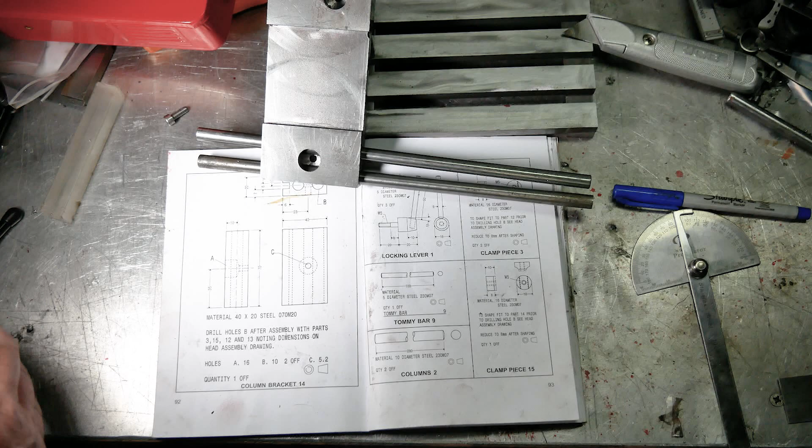So I need to be completely honest with you. I've had to break my own rules in this part. I came across something that was really stretching my abilities and my knowledge. Whoops, and the light just fell over. And that is to make these clamps that go into here, so the reverse of the actual levers, you'll see that they have to slip in between these bars, and Harold Hall describes these cutouts that have to be made. And I didn't understand what he was saying about to shape fit to part 14 prior to drilling hole B, see head assembly drawing. It's not very clear. I mean, you guys might know exactly what he's talking about there, but I certainly didn't.

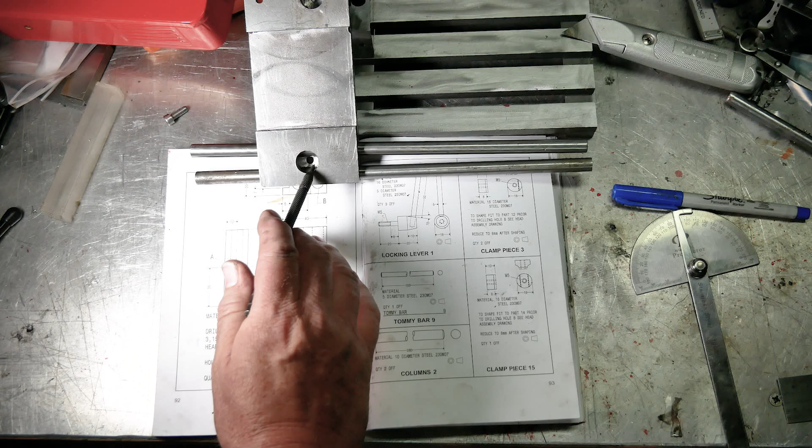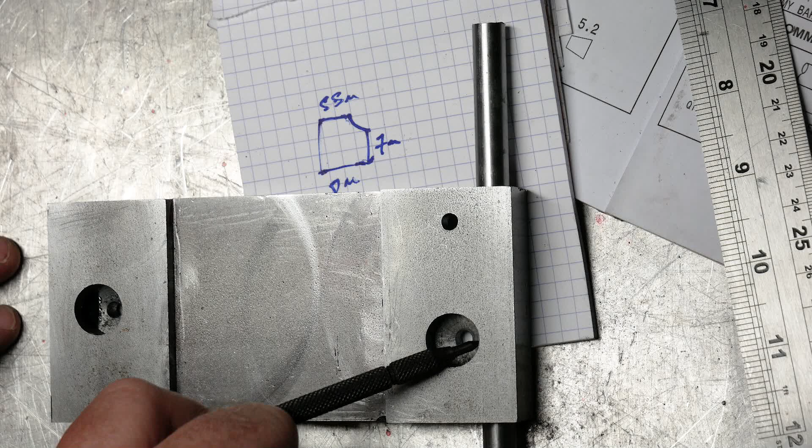I now understand, or at least I believe, that what I have to do is to actually fit the 16mm steel in the hole and then drill. I should have drilled those holes with that in place to make those recesses perfectly in shape. I think that's what he means. Anyway, I am skipping in this part because I did make a complete hash of it, and there's no point showing you all of that. I might show you little bits and pieces. But what I tried to do was to measure this very carefully with dividers, and then get it on the milling machine, and then try and mill the recesses out, etc. Anyway, no surprises, total rubbish, didn't work at all.

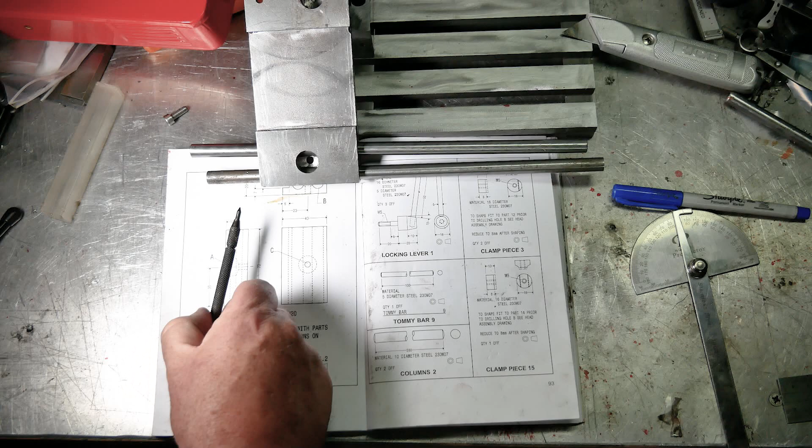So I've completely changed tack, and I'm going to drill through them when I've fitted them in here, through the existing holes. And in fact, I've done one and it seems to be working. But what I'm making at the moment, and this is what we're going to look at first, are these locking levers. So that's what we're going to work on. We're going to go to the lathe and do those in 3 parts. So the first part, oh yes, this is the other thing I forgot to say. In the diagrams, these are supposed to be 16mm, like the stock that goes in there, but I suddenly realized there's absolutely no point. There's no reason for them to be 16mm.

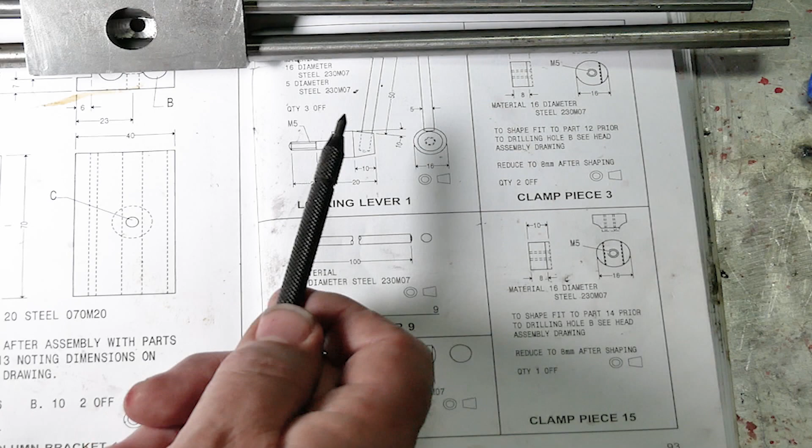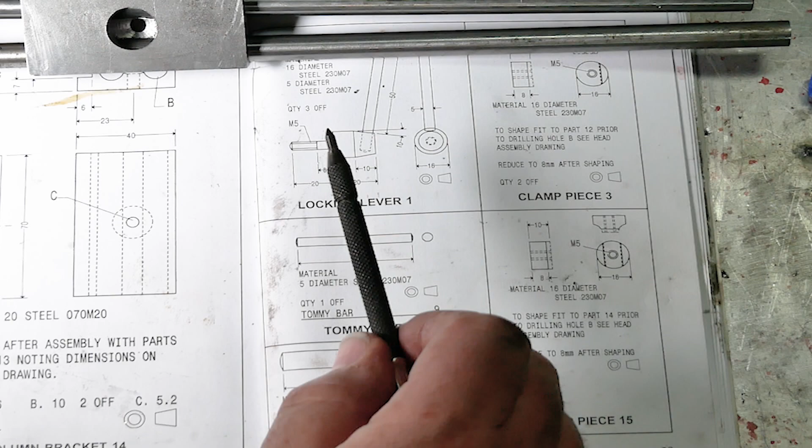And in order to make this really accurately, I want to avoid using the 3-jaw chuck in my lathe and actually use one of the fine collets that I have. The problem is I don't have a 16mm collet. I've only got a 15.5mm collet. So I've decided that I'm going to machine the 16mm rod to 15.5 and then do the rest of the operation in the collet. And the 3 operations are machining that to 15.5mm, then cutting that, and then tapering. And in fact, there's a 4th one, which is, of course, cutting the thread, the M5 thread on that.

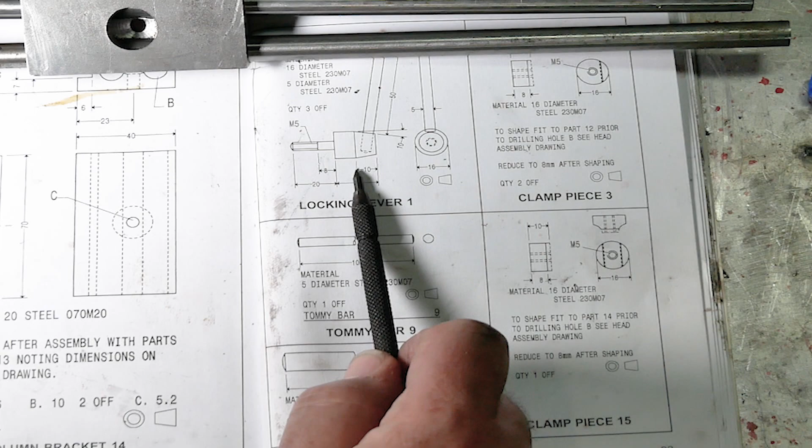But first of all, I'm going to machine that to 15.5. Then I'm going to cut that, reduce that to 5mm. Then finally, when I've made all 3 of them, I'm going to taper that to 10mm on each side, so 20mm altogether. All right, let's get moving.

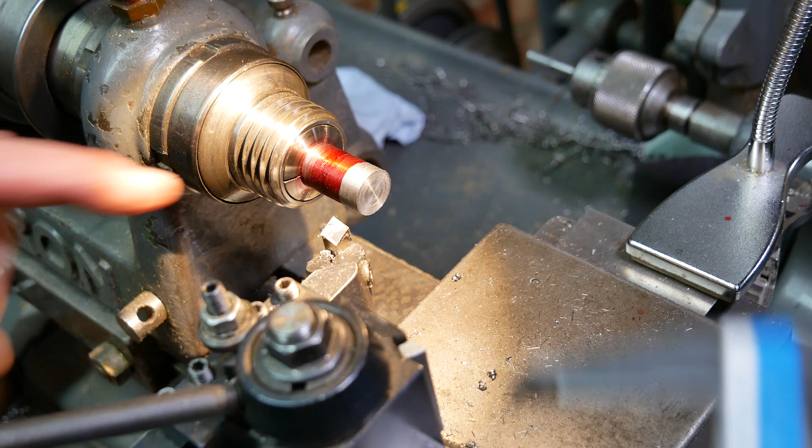The first thing I'm going to do is I'm going to mark off 20mm, which is the length of the screw. I've faced that off to make it nice and clean, and I do this by starting the lathe backwards in reverse, which I find much easier to mark. Now back into the normal direction. I'm going to slightly change the angle on the tool post as well.

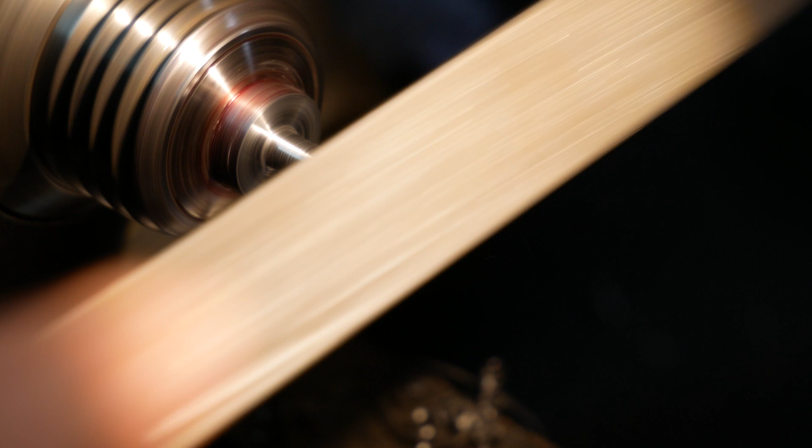Still half a mil to go. I shall probably stay there. To be honest, I'm probably going to keep it there so that I can tap it more efficiently. I'm going to do that. Make the tapping a bit easier. Okay. All right, let me set up for tapping.

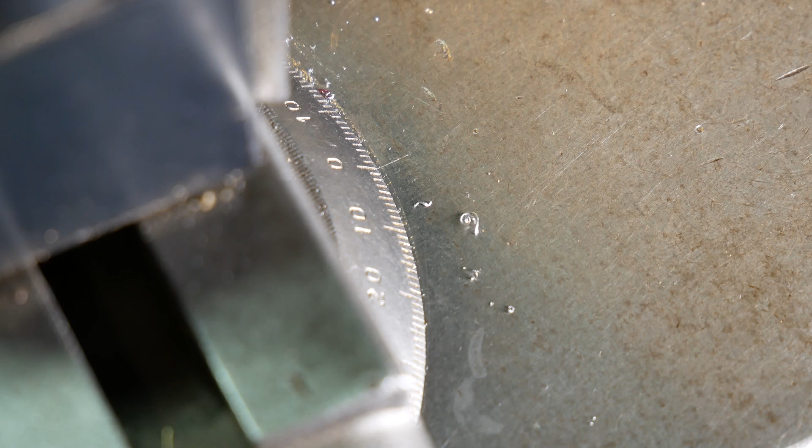I'm really sorry. I know this is a terrible angle for what I'm trying to show you, but it's the best I can do with my setup at the moment. So I'm now going to cut 10 degrees on each side, so 20 degrees in all. So I'll set it to 10 degrees here on the compound slide. Lock it well in place, and then I'll just reset up for the actual cut.

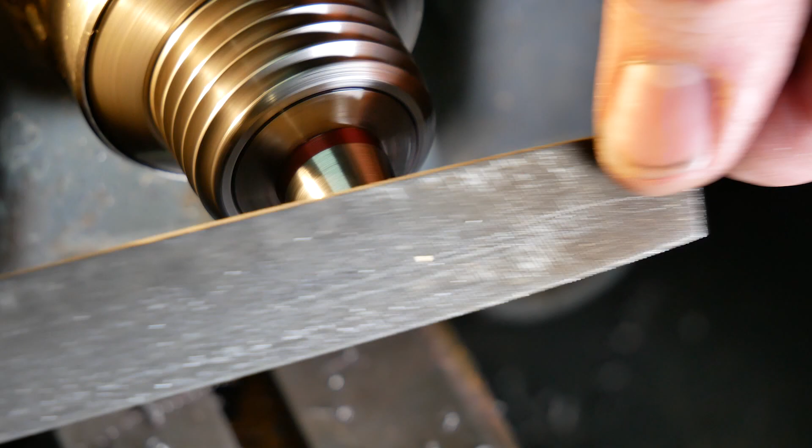This one I've got to be careful because it's easy to go past. See? Do I risk one more? Bingo. Okay, one more to do.

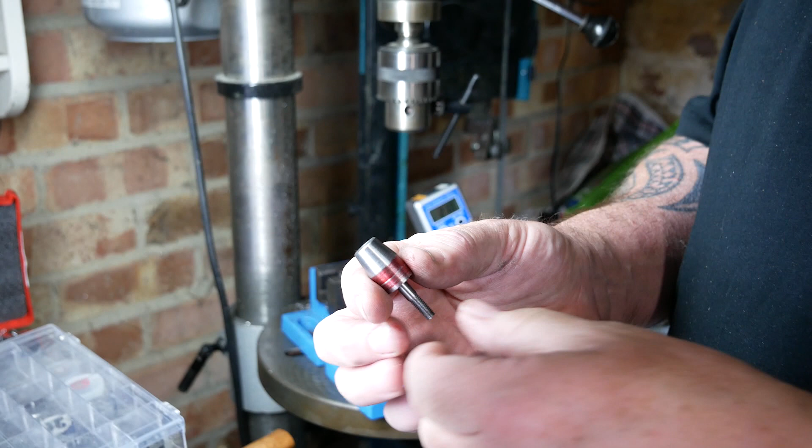So I've got another problem here. I need to drill a 5mm hole into this, and it's going to be perpendicular to this angle here of 20 degrees. And the truth is, I don't have any angle blocks, so I'm not going to go and spend 60 quid on a set of angle blocks. So I'm going to have to try and improvise a little bit.

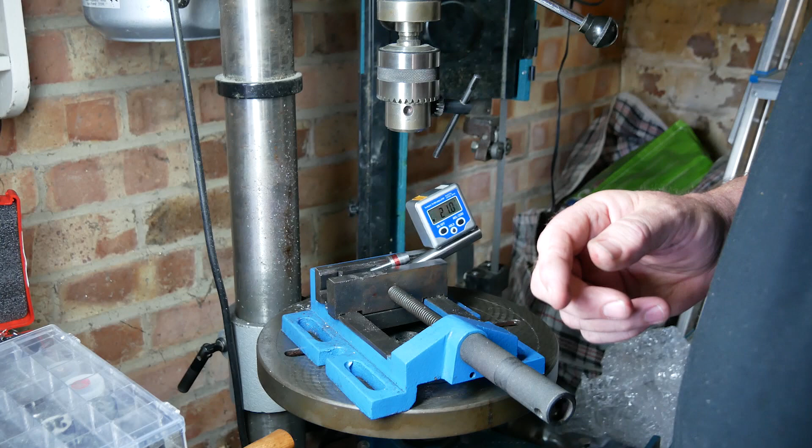So what I've tried to do, and I'm going to describe it here, let me see if it works, is I've got one of these absolutely fantastic digital protractors here. And by the way, if you haven't got one of these, absolutely get one. They're cheap as anything, and they really make your life incredibly easier, especially when you're trying to grind cutting tools and things like that. If you haven't got one, get one.

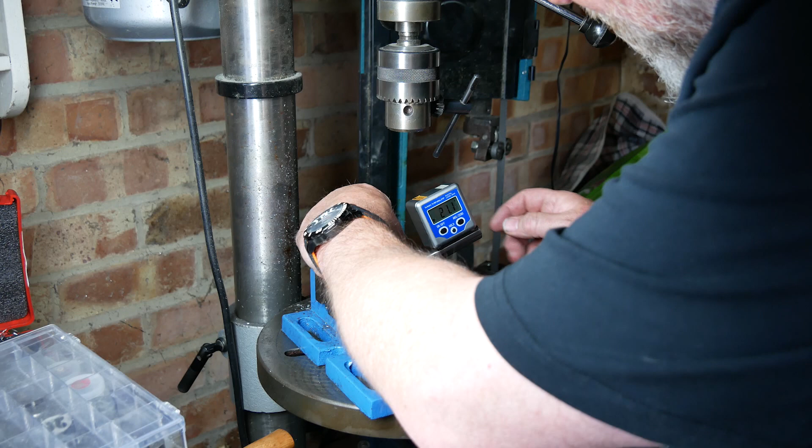I zeroed it out on this surface here. This is the only way I know how to do it. It's completely mad, but if I try and get the square part on there, that is going to be perpendicular once I've got this angle exactly to 20 degrees. And the other thing is that is fractionally smaller than that. So anyway, it's completely mad, and I don't know if it's going to work. As you can see, it's really completely mad. But anyway, let me see if I can magic this at all.

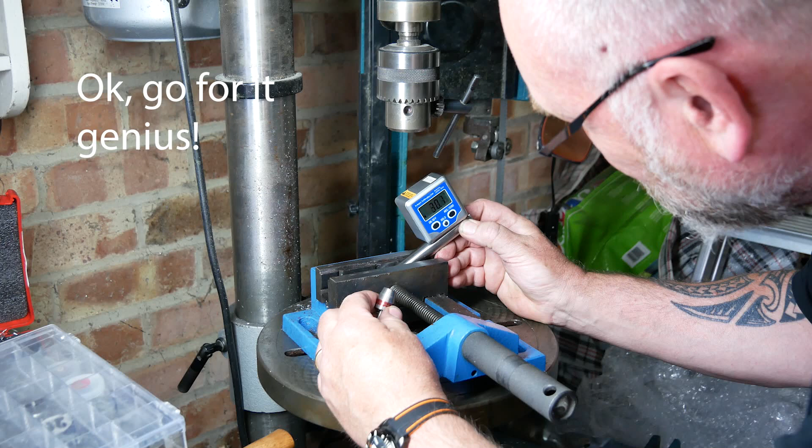So if I can get an angle of 20, and I have measured this angle, by the way. It is 20. My lathe was beautifully accurate here. This is not likely to be anything like as accurate. You're probably all laughing at me here, going, "What the hell is he doing?" Wow. Bloody hard to hold as well. I'm feeling quite foolish right now, actually. I'll be completely honest. Okay, this isn't working.

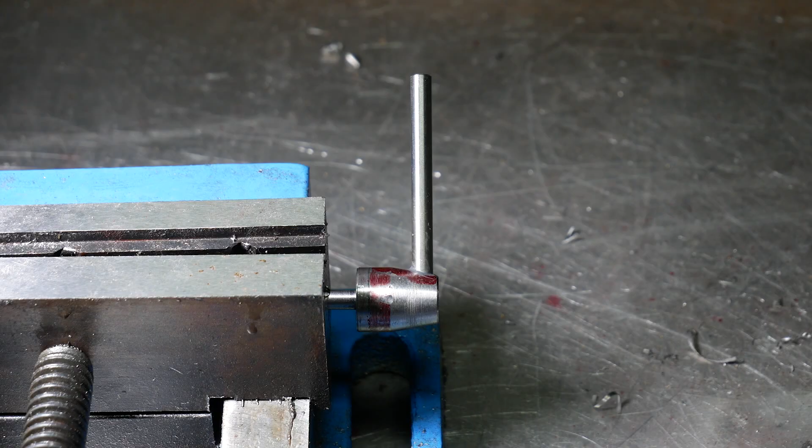So just to show how things can really not go right sometimes, I took immense care drilling that hole at 20 degrees to the perpendicular, and it's come out perfectly perpendicular to the perpendicular. So, you know, there are times when you just have to go, all right, I can't do this very well. And I think the truth is that Unimat just didn't do it, and I'm really pissed off about it.

So what I'm going to try and do is, by hook or by crook, sort out my problem with the drill press. Otherwise, this is what I've got, and I'm just going to have to put these things in perpendicular, which doesn't look quite right for Harold Hall's design, but you know what, it's better than them not working. So anyway, that's where I am right now, and let's keep going.

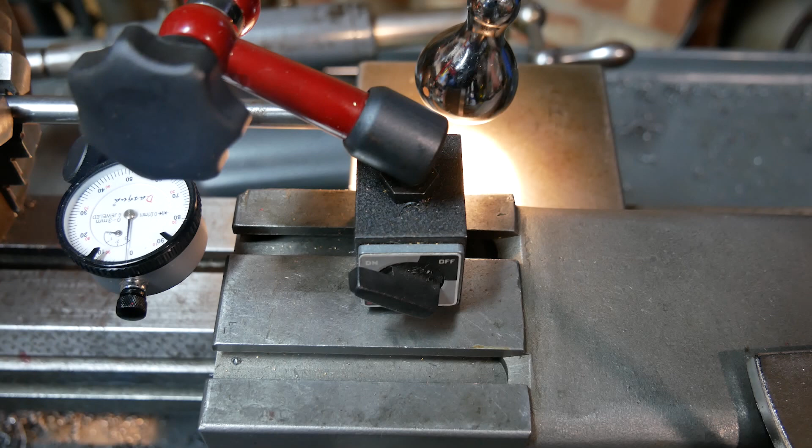So of course, after having changed the compound slide, I want to make sure that my slide is again completely straight, working towards the drilling. So I think I've got it about right. That seems pretty accurate to me. A tiny bit of discrepancy. I think most of that is actually discrepancy in the steel that I've got in the thing. So I'm very happy with that.

So from now on, I'm going to take the 16mm steel and drill it all the way through, tap it all the way through to M5, and then cut it to size, and then drill it down through the top piece.

I managed to break the drill inside the rod, so I'm now going to see if it's actually broken inside the rod or whether it just snapped. Whatever happens, either I will be able to turn it round or I will use another drill bit. Oh, I don't know if it broke. Anyway, let's find out.

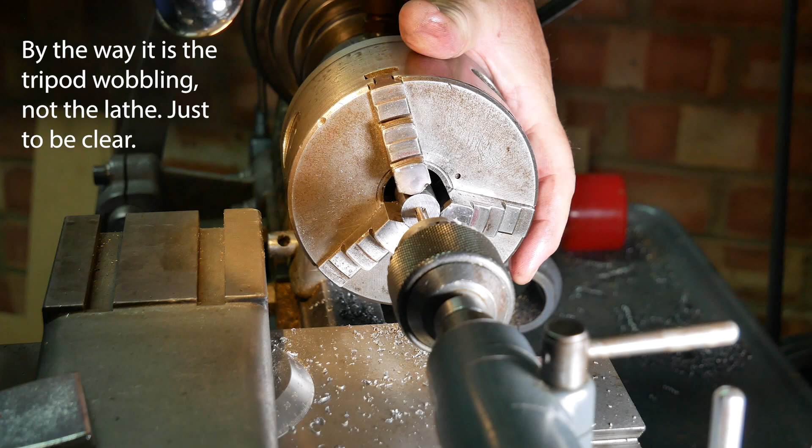So now, without moving anything, I'm now going to put the M5 tap. Okay, M5 tap is now in. Put my foot on the clutch so it turns freely by hand. Now obviously the important part here is to start it straight. It's probably safer to then put it in a vise, and of course this slips because the tap is not designed to be in a chuck. So what I'm going to do now is I'm going to take all this out, put it in a vise, and then do it by hand.

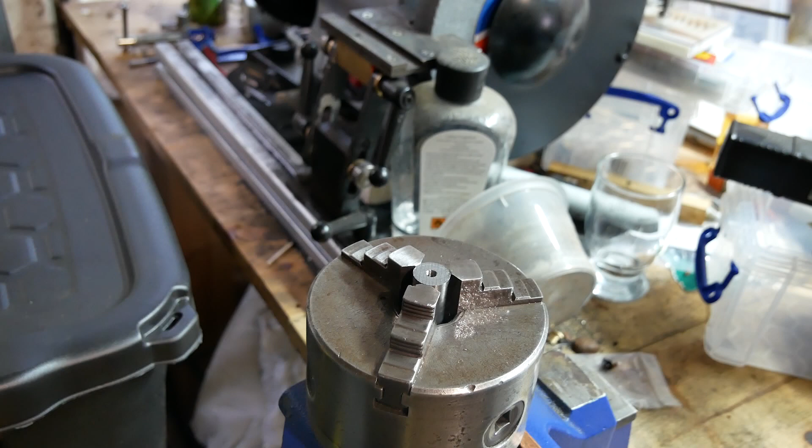So I'm probably going to have to do this in stages, I now notice, because I'm not sure the tap goes deep enough. It's quite a long piece of steel, this. So what I'm going to have to do is to part the first piece and then get it to size, and then we'll do the second piece. So let me do that.

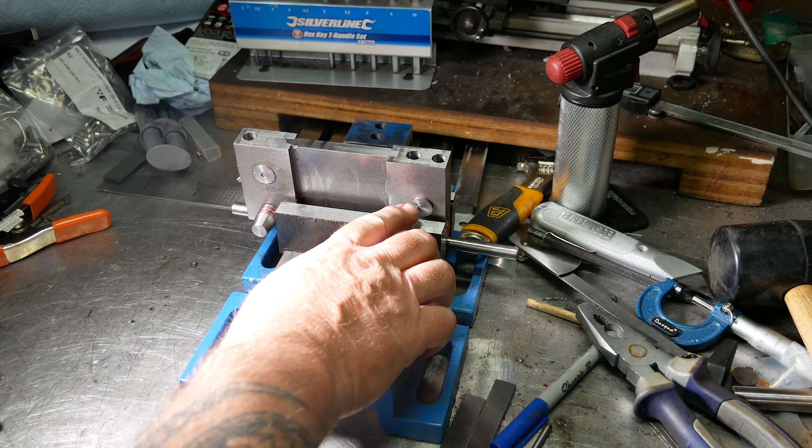So what I've done is I've now cut and drilled and tapped the clamps that are going to hold the locking levers on the other side. Here we have the locking lever and here we have the clamps. And so what I'm going to do now is drill through with a 10mm drill straight through and then cut that recess into them. I've loosened them a little bit because I want them to have a little bit of tension when I lock them. As you may have seen earlier, I did a proof of concept on one and they hold really well.

So I don't have parallels that are long enough, so what I've done is a piece of silver steel, which is precision ground. So I'm very much hoping that that's going to actually do it. And then I'm going to drill through these and let's see what happens. Okay, your guess is as good as mine. Okay, let's see if this works.

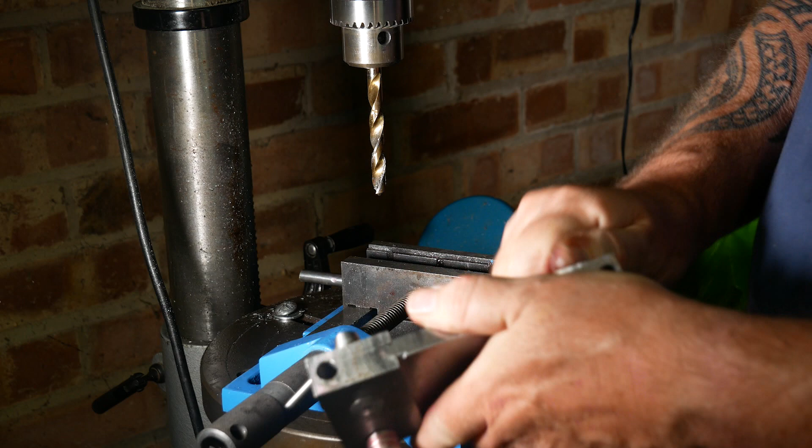What happened there? The screw broke. I'll bet you any money the screw broke. That's the only way this could have happened. Oh my God. So I can't tell you how blue the air turned in this workshop just now.

I thought I'd been very clever, and I thought that by clamping these two pieces through I'd get a perfectly good cut, and I certainly got one, but when I started doing the other one it obviously twisted and snapped. So I've got to make both pieces again. It's a lesson. Interestingly enough, when I super glued the piece in, it worked fine. When I held it in with a clamp, it snapped. I should have thought about that. I should have thought that this was not strong enough to take the torsion, I think it's called, or the twist. Anyway, here we go again. Jesus.

Okay, so I've really had a bad day yesterday, as you probably noticed, and so I'm back today with renewed vigor, and I have really super glued these pieces in. They are really firm. The one down there, that one's already done, and this one here, they ain't gonna move. The biggest issue now is going to be to take them out, but I'm not taking any risks.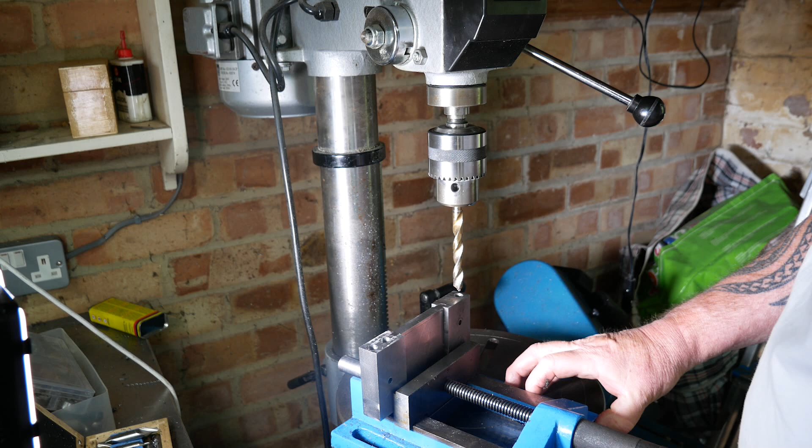So this one I have to drill both holes through it to shape that, and this one I have to drill one hole through it to shape that. So I'm going to take this out because otherwise the drill's going to smack into it at the bottom. And this time I'm also going to clamp the vise down to avoid any nasty surprises, or at least as much as I can on this thing. Okay, well, hopefully bingo. Let's find out.

Okay, so there's a little bit of learning going on here. This is part 4, and I said to one of my YouTube buddies, Dimitris, who said, "Hey, it's looking really good." And I said to him, "Yeah, but now it's really going pear-shaped, as we say in England, or Pete Tong," as a lot of English people will know. I'm really screwing up in quite a monumental way, and I've become very frustrated, and I know that's part of the whole thing, but I wanted to share with you because I think this is part of what the channel is about.

So the first thing that happened is this piece, right? So there are two 10mm pieces that come in here and one that goes in there, except I didn't look at the plans right. Those are 10mm, those are 12mm. That one is 12mm, and I didn't notice that.

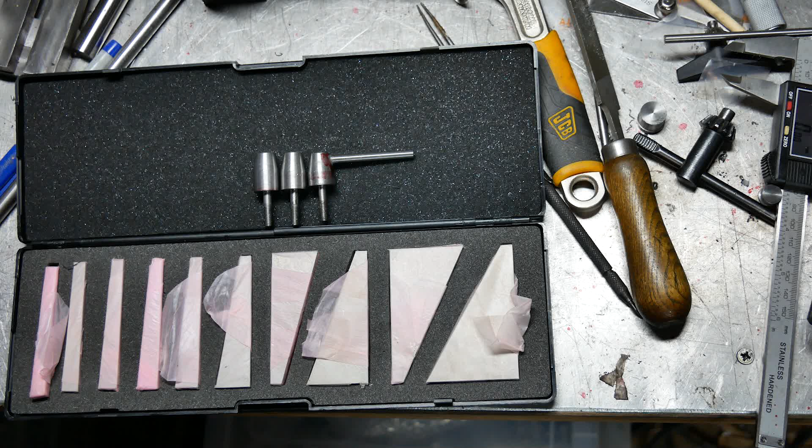Okay, so I've made the 3 locking levers after all my disasters, and if you remember last time, I tried to be clever and drill this to 20 degrees, or at least parallel to that surface on the angle, and it came out parallel to this one. So it's not the end of the world. I'll live with that, but I want to get it right for the next 2.

So I did splash out in the end. I decided to buy some angle blocks because I'd like to make this right, and I'll see if I can make it work. So anyway, that's the next step.

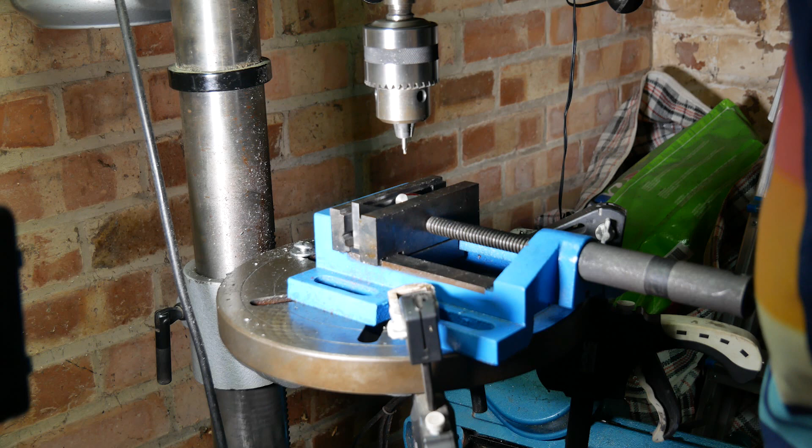Alright, so I've got it on the 20 degree block. We should be okay. I've marked out the center line. The way I did that was I found out exactly the width of these jaws, and this is halfway down, so hopefully that should work. And so let's use the center drill and the punch drill. Okay, and now we're going to switch to a 5mm drill bit. Okay, let's see if I can save the situation.

Okay, I'm not taking any chances. That's going to be deep enough for me. I can't ruin another one. That should be deep enough to hold the rod. Okay, on to the next one.

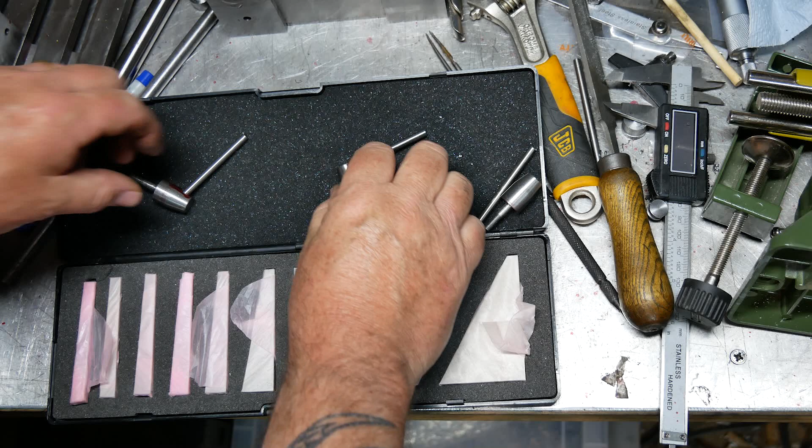Well, by some miracle I've done it. So this is the one that went to the wrong angle, and this time, despite a hiccup, I managed to get the other two at the angle I wanted. So now I'm going to bond those in and file the ends and round the ends, and then I'll show you when it's done, and then I'll put the whole thing together, and hopefully it's going to work, because this one has really been a real pain for me, for no other reason than my lack of skill.

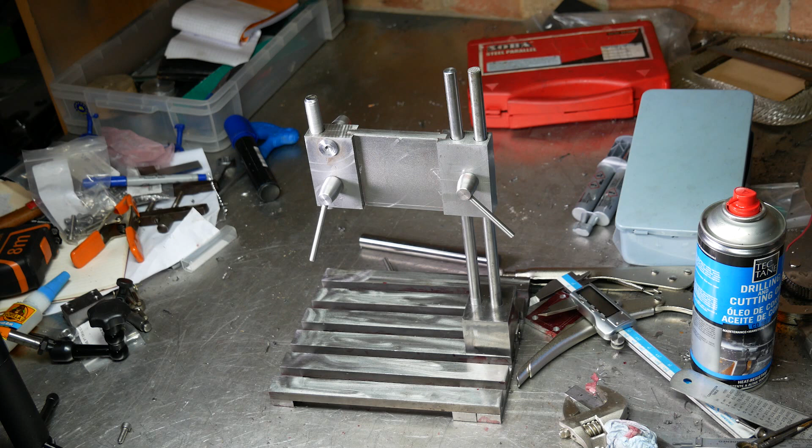Well, eventually I've done it, or at least I've done this part of it. There it is. It works so far. This episode, or this part, has been absolutely full of screw-ups. It's going to be my blooper reel, I think.

I really hope the next stage, the final stage, goes better. This is just a dummy to make sure the clamps are working fine, and the next stage will be to make the actual pieces that hold the taps in the tapping stand. So that'll be part 5. And wow, this one's been a real adventure. I thought this was going to be a doddle, and it wasn't. Anyway, live and learn. It's been fun, and I'm glad it's done.